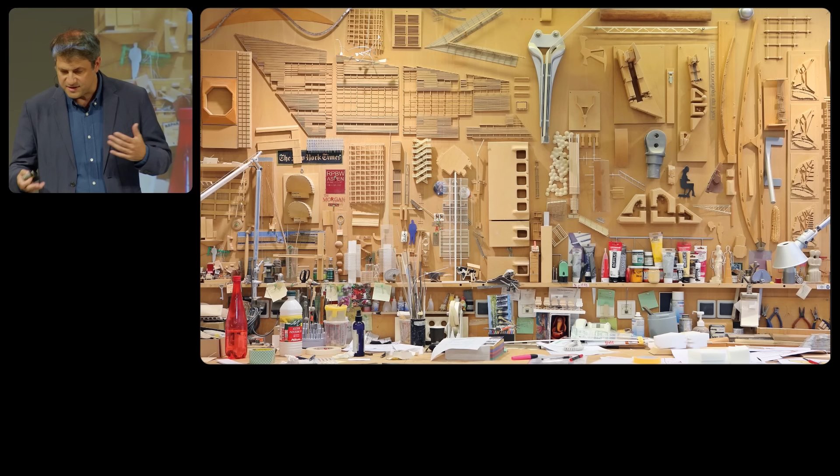And that process is a process of research, of trial and error, iterative seeking for the correct answer for the project. And we believe that the notion of workshop embodies very well that research. And there's lots of tools to go through this research. We use hand drawing, we use digital drawings, of course, as well.

But there's something that we really like to use, especially at the beginning of the project, and this is the physical models, because the physical models are something that you can manipulate with your hands. You can do lots of iterations pretty quickly, and they allow you to test different massings, different scales of the building, different proportions. And sometimes even while you are trying with your hands, you may find something unexpected, and then that initial idea that you had diverges to something unexpected, and that's the magic of this approach.

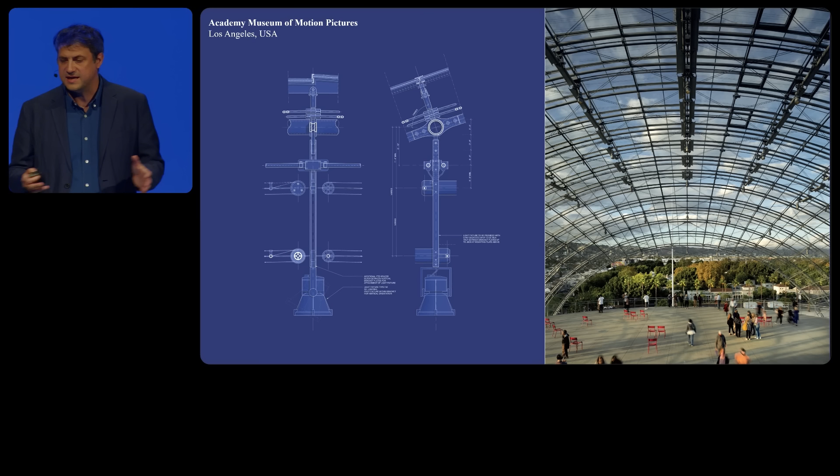Another important element of that research, that idea of workshop, is detailing, but not detailing understood as something that you did at the end of the design phases, the detailing of the building before you start construction. Detailing understood as those aspects of the building that from the very beginning of the design, you want to capture, details that represent the essence of the building. And then those details that you start drafting from the beginning evolve with the rest of the design. And that's the best way to finally get to a very well crafted building when it gets built.

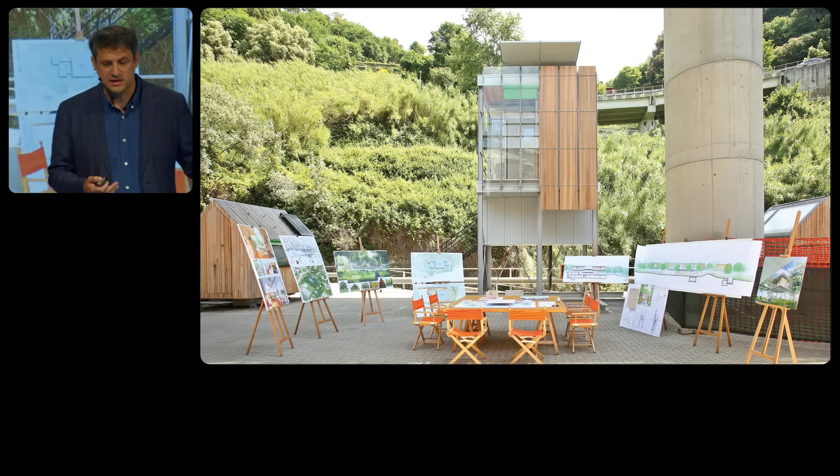There's detailing, and there's also, in this notion of workshop, one-to-one prototypes that we do in our facilities in Genoa. The opportunity for us architects, but also for the clients, to see for the first time the materiality, the scale and the atmosphere of what we are planning to create.

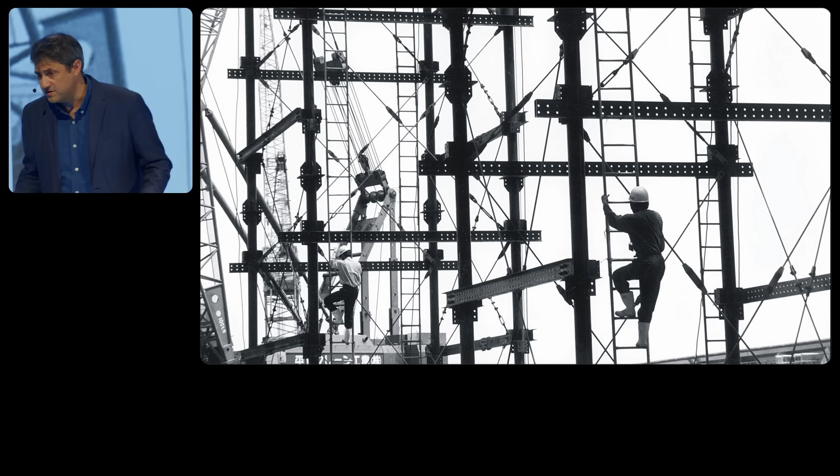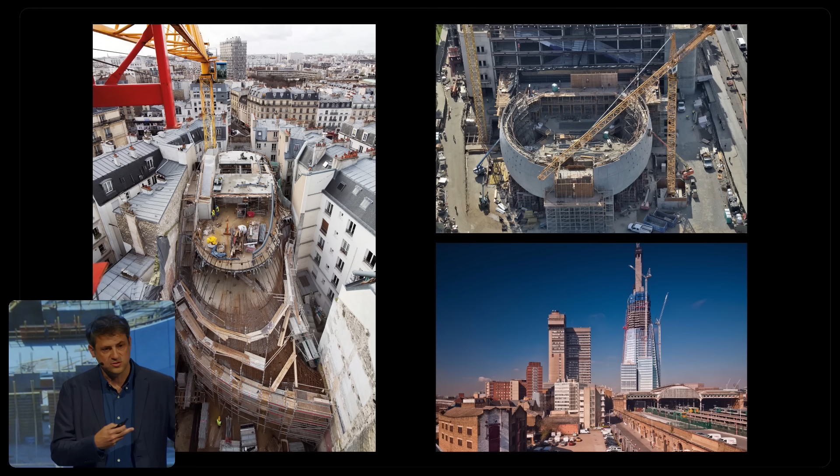And finally, in this process of research construction, we love construction sites. It's when things get real, and we like very much to be there. So we are next to the executive architect, making sure that all the decisions we take align with the character, with the essence of the project that we are trying to build. And that's the first notion of workshop.

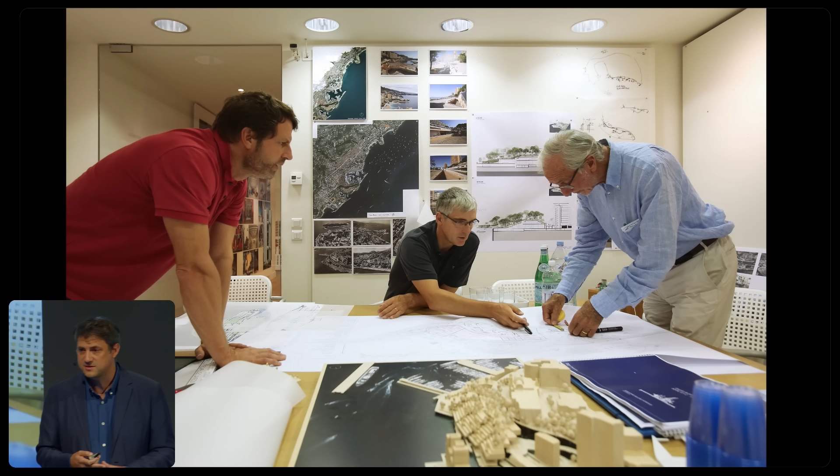We give another meaning to the word workshop. One was that process, that research. And the other meaning is the fact that the buildings are the result of a collective effort. It's not just the architect having the brilliant idea, it's really a choral of people, each one of them bringing their expertise, and that includes the clients. We need good clients to do good buildings, engineers. Everyone needs to sit around the table and bring their best in order to get to the best possible building.

Then the second notion I wanted to go through with you is the notion of what does it mean to build sustainably or to build responsibly. And we take a very broad view on what this means for us, building responsibly. In a nutshell, it is improving the life of those people using the building or being affected by the presence of the building, and doing that respecting what was already there before we started building.

If we go into this notion of building responsibly with more detail, the first thing that I would like to say is the idea of resiliency, building buildings that can sustain earthquakes, typhoons, and that will be there for hundreds of years, flexible enough to anticipate problems that may occur in the future.

Building responsibly is also erecting buildings that participate in the social life of the city where they are built, buildings that are open to the people and that encourage exchanges between people, etc.

Building responsibly is obviously respecting the natural habitats where we are intervening. And finally, it is harvesting green energy as much as possible and building with local materials and low carbon.

And the third notion that I wanted to go through with you today is the notion of movement. That idea of movement is ingrained in our architecture from the first projects of the practice, and it is this idea to experience the building in a promenade. It is how you really navigate through the building that makes the project interesting.

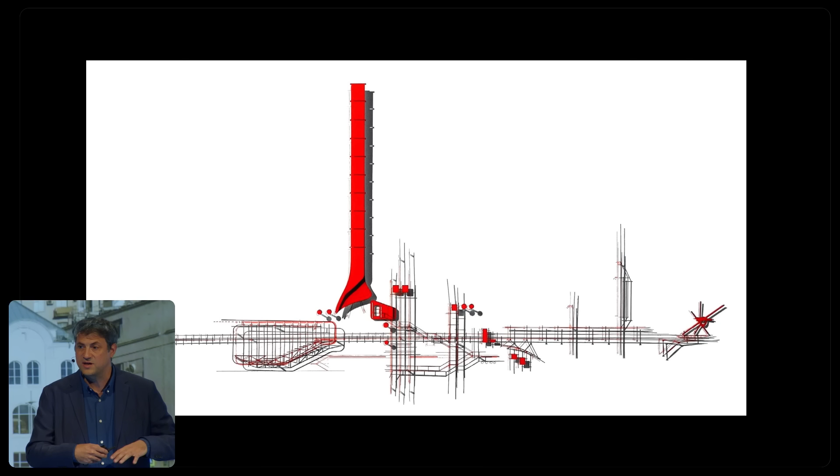Sometimes that notion of movement is not explicit from the outside. That's the case of a cultural foundation that was previously a power plant in Moscow. And what seems a power plant from the outside, when you get into the building, you discover a web of vertical and horizontal circulations that allow you to navigate and to discover the building from the inside.

Lightweight walkways, staircases that are in harmony with the pre-existing structure of the power plant, light enough not to interfere with the steel and the clarity of the pre-existing building.

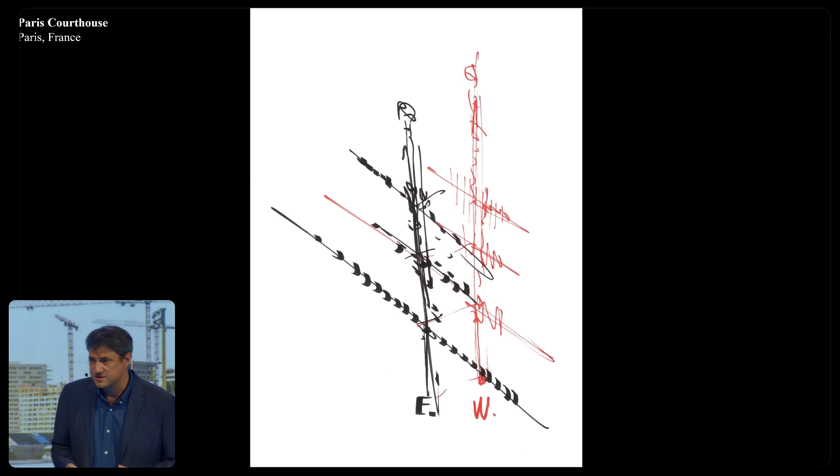On other occasions, that notion of movement becomes more explicit in the building when seen from outside. And that's the case of the courthouse in Paris, where we can see that the massing almost is formed by this idea of expressing the movement. We have a vertical spine at the very middle of the building's elevation, and that's where the vertical core is set. And that vertical spine that we can see, these are the tracks of a panoramic lift going up and down.

And then from that vertical spine, we can see the horizontal terraces extending sideways, which give you the opportunity to see the city of Paris from these landscape terraces. And finally, the solar panels as well, which emanate from that vertical spine and also define that horizontal circulation of the people trying to find their room from the central core.

In other occasions, like in the Georges Pompidou Center, everything was put on the outside of the building so that the interior of the building would be only dedicated to the contemplation of artwork.

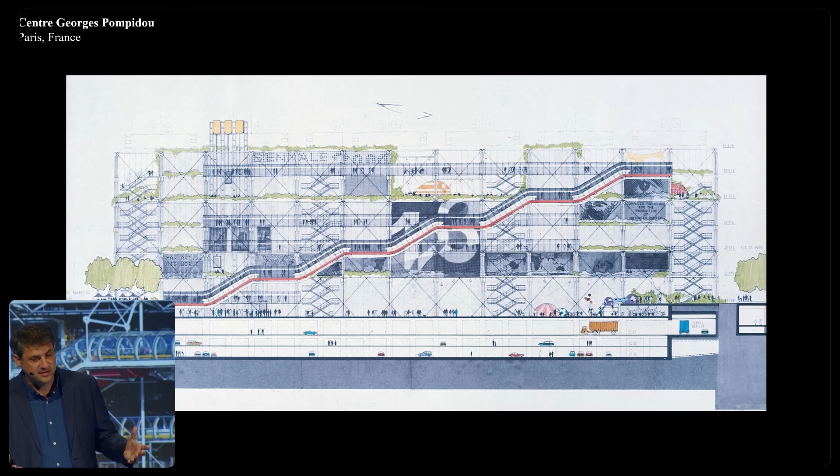And in this gesture of getting everything outside the building, structure, services, also the circulations get outside the building, and they become the main feature of the main facade of the building, that escalator going up, and the introduction of the idea of promenade, something that you start from ground floor, and those escalators taking you up to the top floor.

In other occasions, it's not one promenade that the building is offering. Sometimes more than one promenade is being offered. In this case, Centro Botín in Spain, the building is lifted off the ground some meters, and then from the center, you can see below the building the seaside promenade. So the first invitation the building is doing is this gesture of letting you go beneath the building to find the sea and to walk along the sea.

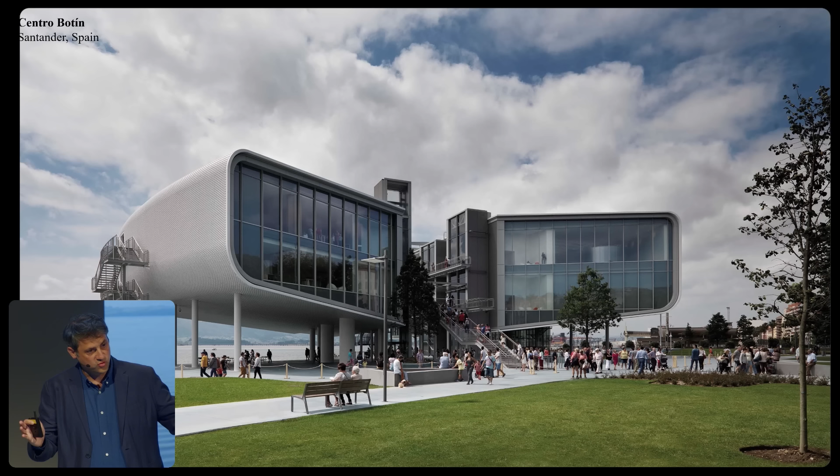But then parallel to this invitation to circulate beneath the building, there's this invitation. You can see the two masses of the building on both sides in a sort of welcoming gesture, almost. And then in the middle of the two main masses, you have that staircase, which takes you up to the entrance of the building, but also to something a bit more special, which is a sort of goal at the end of the promenade, which is that belvedere that oversails the sea and gives you those magic views of the Cantabrian Sea.

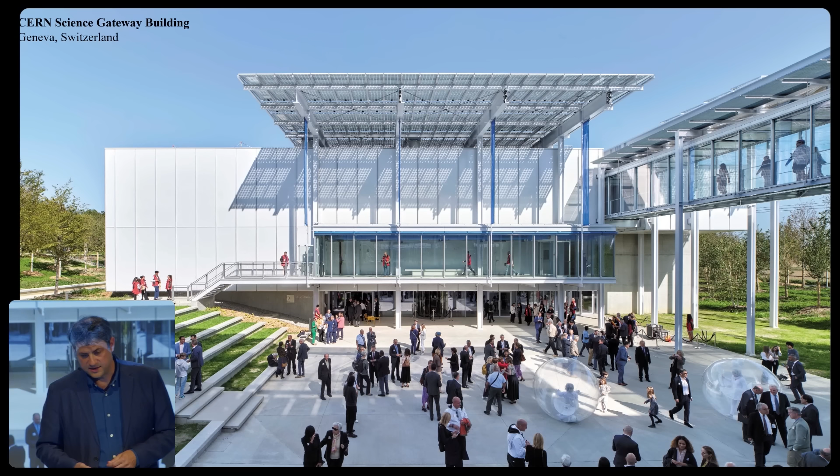Something similar happens in the CERN in Switzerland, where different buildings are connected both through piazzas and elevated walkways, and each device invites a different kind of movement with a different speed, with a different pace.

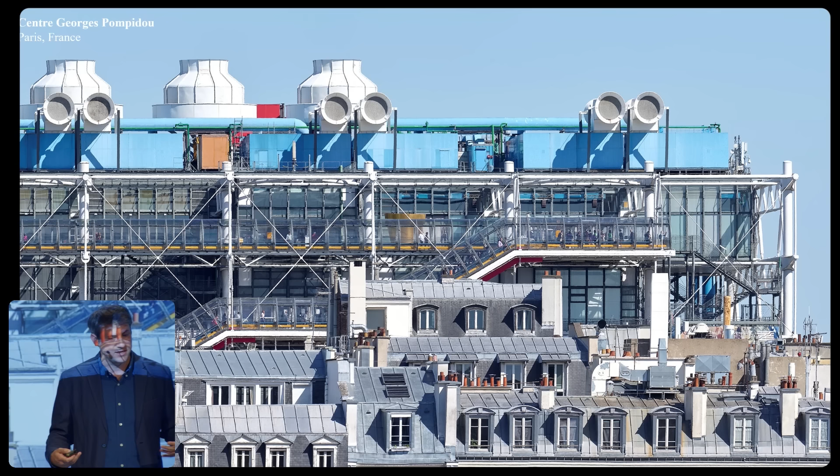Sometimes you don't move anymore, and you just stand still, and then you look at the movement deploy in front of you. That's the case when you go up. That photo is taken from Fondation Pinault in Paris, and you have a very nice view of the Pompidou Center. And from that perspective, you are not moving anymore, and then you see the people moving up and down the escalator and along the horizontal walkways, and that becomes a spectacle almost.

And then sometimes there's no movement anymore, but even when there's no movement, there's at least the wind and the sunlight that may produce surprising glaring on certain metallic elements.

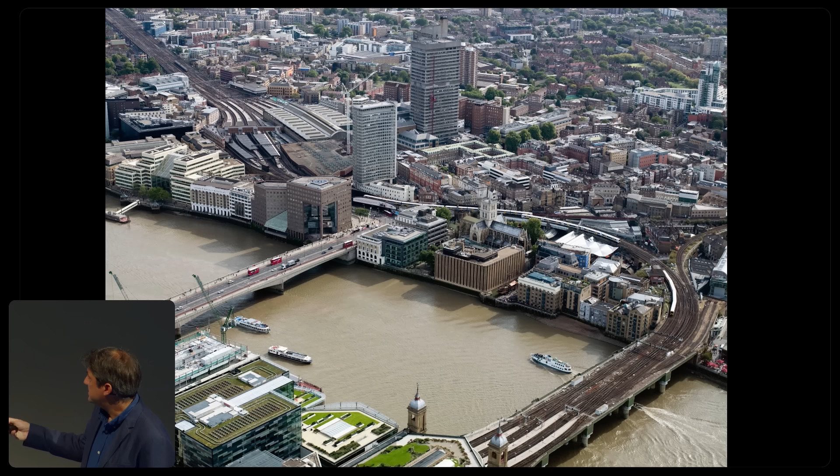And let's take a look at how London Bridge Station was before the intervention. We can see the station is that white building, which abuts against that sort of brown building, which is the bus station. We can see in this image and on the next one how there's no indication of urban space there. Everything is covered by roofs, and I'm going to go to the previous image, and the station, instead of having a clear facade and a piazza in front, some quality urban space, has nothing. It's even difficult to find it.

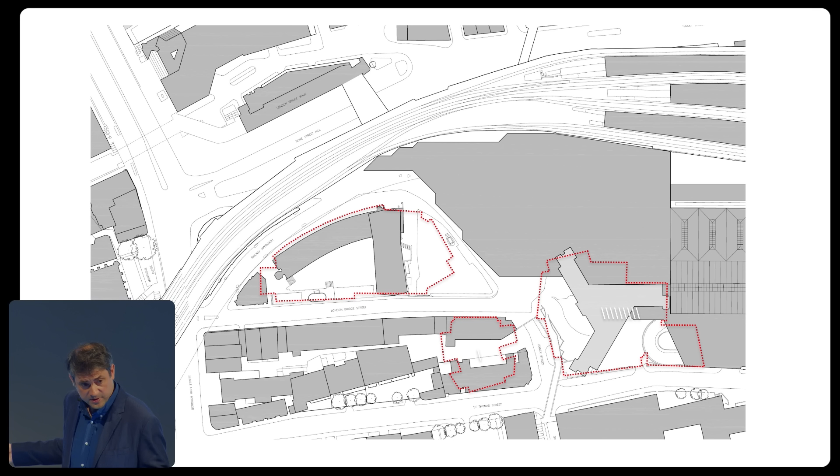That's how it looked in plan before. That's the image on the right. We can see these big gray areas are the roof of the bus station, and that's the roof of the railway station. And we can see the pre-existing buildings and the almost total absence of urban realm. And that red dotted line is the boundary of the buildings that we are planning to build in that process that lasts 25 years. The Shard on the right-hand side, the News building on the left, and Shard Place in the middle. And what we are trying to achieve is what we can see in that other image.

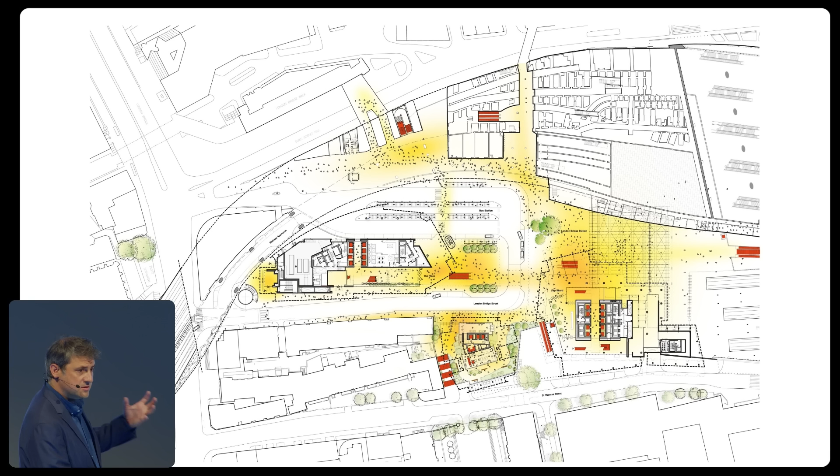Our new buildings, that's a diagram that shows the intensity of movement, if you want. The more intense the orange, the yellows, the more intense the movement there. And we can see how the buildings hardly touch the ground. The boundary of the buildings oversails the public realm, and then the buildings only touch ground with the cores and the entrance lobbies that we need to access the building. The rest is liberated for the public in order to generate public realm.

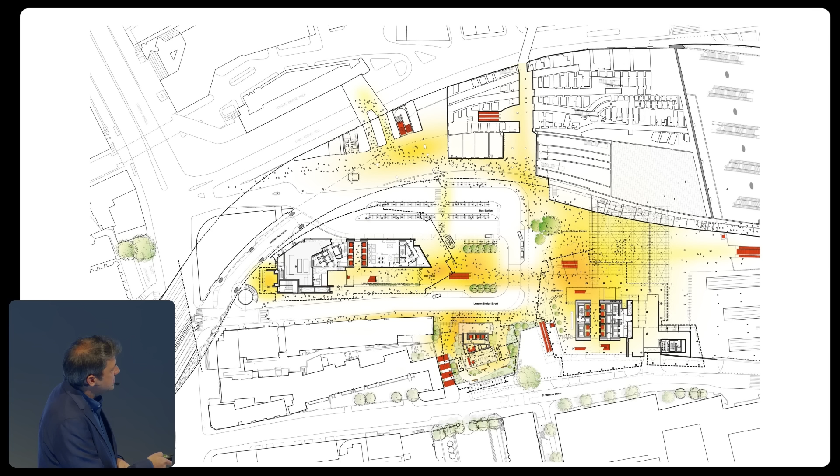So by doing this, the first thing we can do is to demolish, obviously, that big roof, that big structure that was covering the bus station. And then we relocate the bus station partially under the News building, liberating all that central area so that we can have a central square at London Bridge. Then, by doing all that, we liberate the space to have a clear entrance to the railway station, as we'll see later.

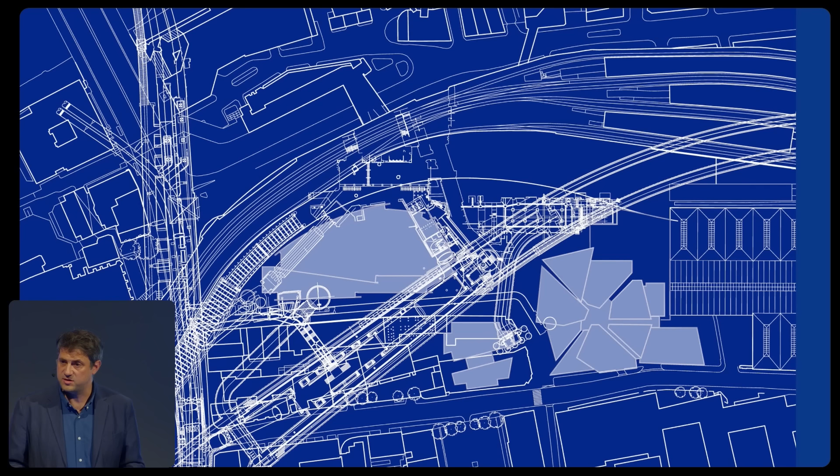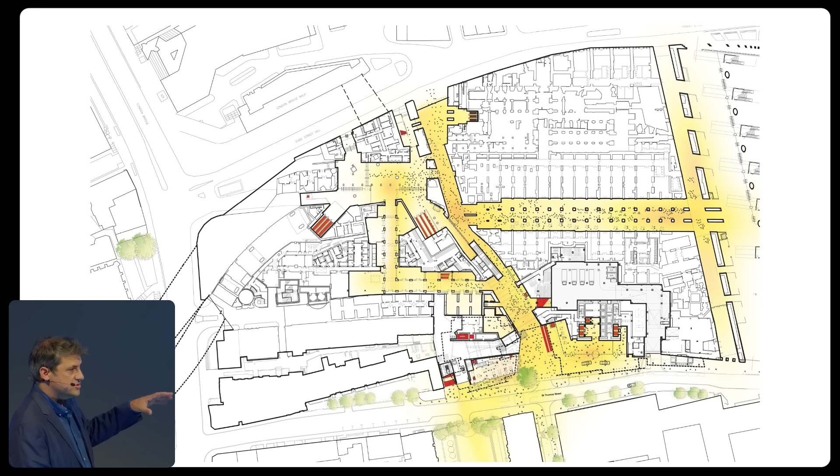But we also need to be mindful of what happens underground. We are building on top of a maze of tunnels because we have two metro lines passing below our buildings, the Northern Line and the Jubilee Line. And that's another reason why the footprint of the buildings when they touch the ground is very limited. And on top of that, at the lower level, we also need to improve all the circulations and the access to the metro stations by the construction of these three buildings, the Shard, Shard Place, and the News building.

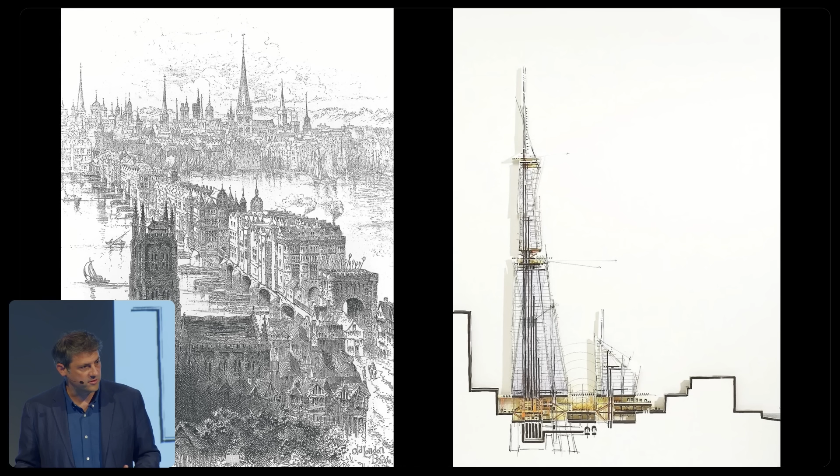And because that high-rise building, the Shard, is not standing in a cluster of other high-rise buildings, the idea was to give it a recognizable shape, and also a shape that makes the building not imposing. And getting inspiration from the Venetian paintings, where you see all these spires emanating from the religious buildings across London. From that came the idea of having a building that is larger at the bottom, and it goes thinner as it rises up to the sky.

It vanishes to the sky, and there was the idea also that the different shards forming the shape of the building would never meet each other. They would leave the end of the building open, and they would just coincide somewhere in the air, in an imaginative vanishing point. And that's the result, that building that is larger at the bottom, and it goes thinner, and it's not imposing at all. It feels light, inviting.

And then this aligned with the brief, because in the brief we had offices, hotel, and some residential. And then that shape, the lower part of the tower, adapted pretty well to the offices because it was larger. And then the top part adapted much better to the hotel and to the residential units.

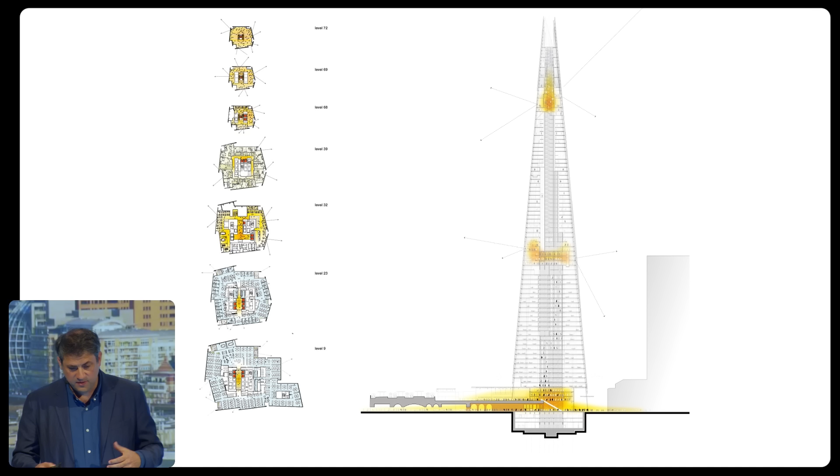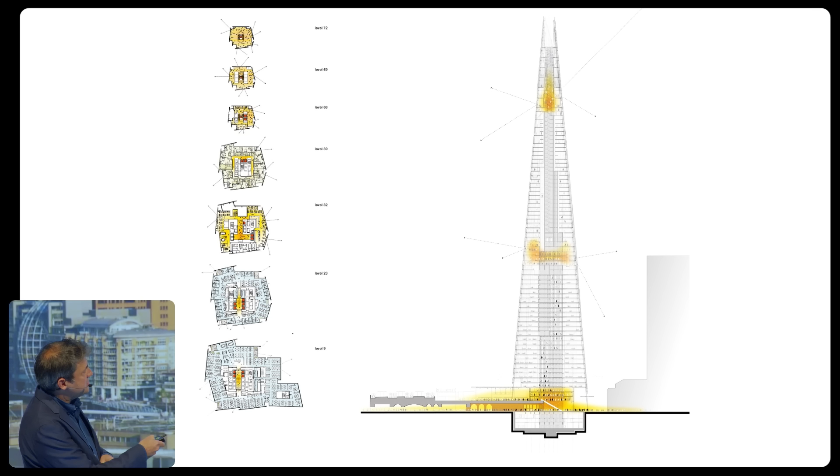And then going back to the idea of movement and flow of people, there was this intention to bring the public also up the building. The building should be open to the people, should not feel like a fortress. Hence, this idea to have some floors in the middle with restaurants open to everyone, and at the very top, a viewing gallery from which to see London. It was the idea that the access of this gallery was free of charge, but the client thought otherwise.

And then, because we didn't want the building to feel imposing, and we wanted the building to feel so light, there was this idea of taking advantage of the fact that the facades are inclined, and that because they are inclined, they will have this ability to reflect the changing light, the changing conditions of the sky. The ceiling of the sky, of the London sky.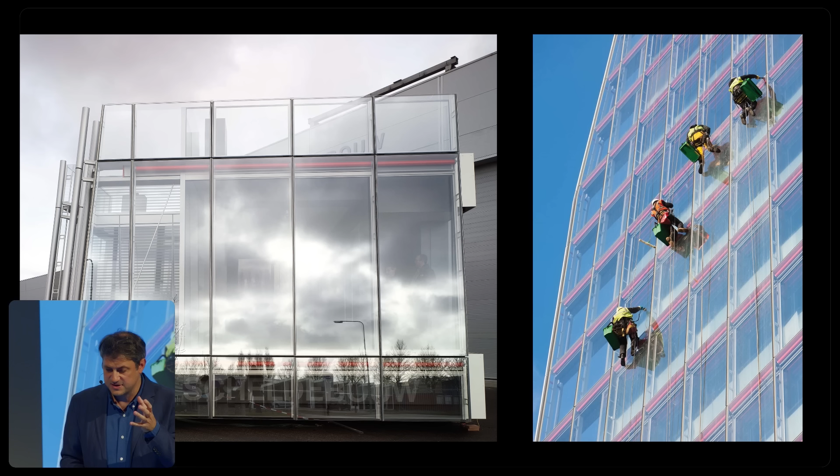So we wanted to find a facade that could reflect those changing conditions, but not like a mirror building. It's just subtle reflection. Sometimes you can see through, sometimes you have those vivid reflections that animate the facade of the building. And then we worked with a glass manufacturer, and we developed a new coating, which is around 25% reflective. And that gives that special color that the Shard facades are able to project. And this is a bit the result, where even at dusk, depending on the incoming sunlight, you may see the different planes of the Shard getting those vivid reflections.

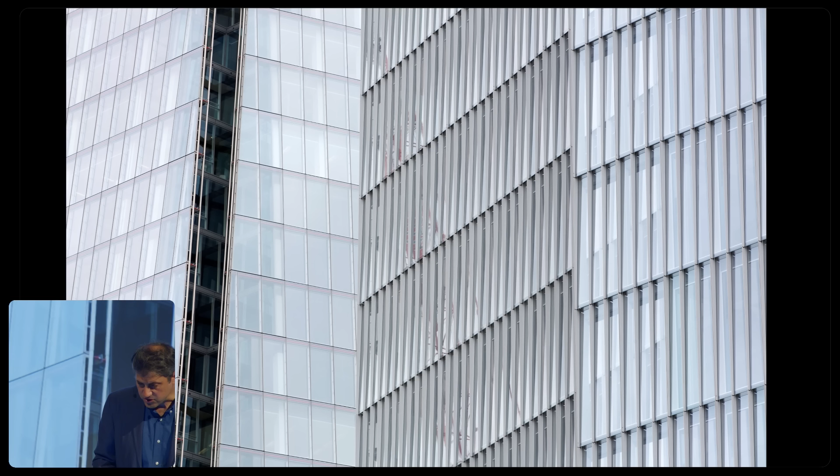And once the Shard was completed, it was the turn of the News Building, which was completed in 2014, with this idea that that building needed to share the DNA of the Shard. It should look of the same family, but at the same time, we wanted the building to state its own character. So we didn't want the building to have inclined facades, but still we wanted the building to reflect the sky. So in order to solve this, we opted for setting each glass pane inclined, but then to set them in a shiplap position so that the overall facade is vertical, but each glass pane is still reflecting the sky. You can see in this image the Shard facade, which is inclined, and then the News Building facades, which are vertical, but each glass pane is inclined, reflecting the sky.

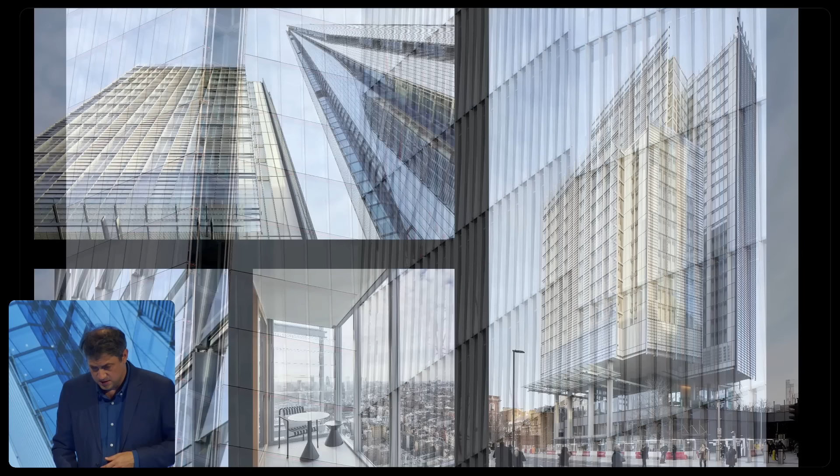And then finally, Shard Place. And in here, we wanted to give it a more residential look, because it's a residential building, and we needed to introduce opacity, of course. Also, we had to try to use glass in a different way. So still the same coating, still inclined glass panes, but in this case, these glass panes are very small, are louvers, and these louvers are set in a shiplap position again, and they give a very different grain to the facade of the third building.

So overall, it's a complex of 3 buildings. They share a lot, they have a lot in common, and at the same time, each one of them affirms its own character. And the 3 of them as well have operated a complete urban transformation of London Bridge Quarter.

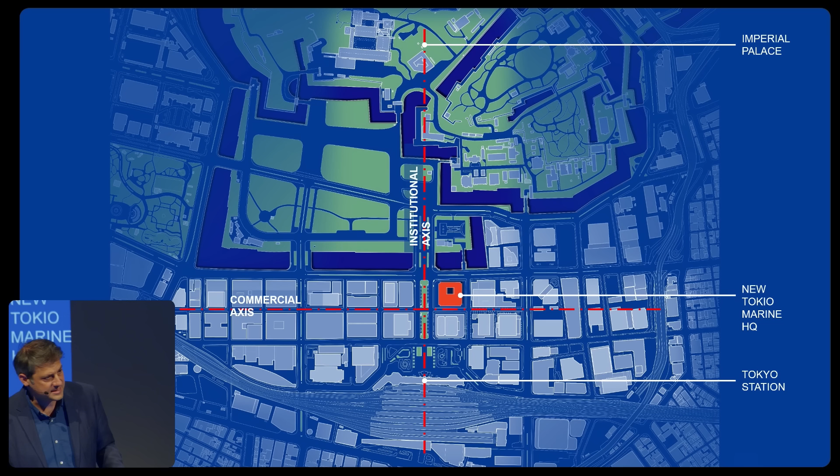And that takes us to the second case study, which is Marunouchi Tokio Marine. It's the headquarters building of an insurance company in Tokyo, and it's a very special project. The client came with a very strange request. They told us that they needed a new headquarters building, but they wanted us to use as much wood as possible. The reason was that they wanted the building to be a bit of a manifesto.

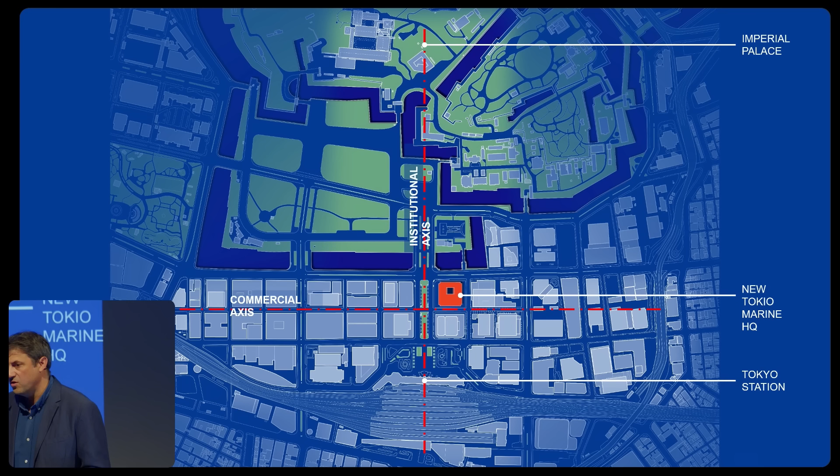The wood industry for large-scale buildings is not very developed in Japan, far from the situation in Europe, and they wanted this building to really trigger a change in the local industry. So, getting back to the building for a moment, the location is amazing. The building is right next to Tokyo Station, and in front of the Imperial Gardens. Tokyo Station is probably the most populated station in the world.

And then it's a large scheme. It's 84 by 84 meters in plan, 100 meters in height. And yet, in the context of Marunouchi, the Tokyo Financial District, it looks contained. We were surrounded by such big monsters that we decided the building had to be special for its well-balanced proportions, the lightness of the facades, and also the use of wood. And finally, the building needed to be special also for how it participates in the social life of Marunouchi, the social life of Tokyo.

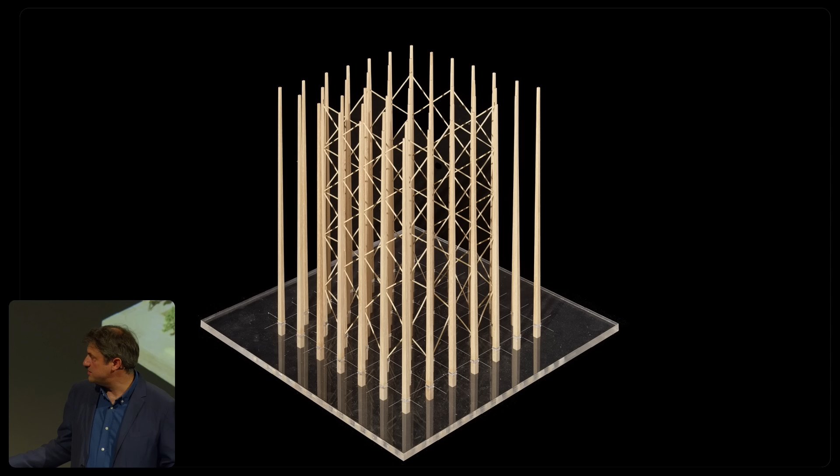So going back to the question of wood, we really like to use wood, but we wanted to use it meaningfully, to make sense of it. So we started a bit of research looking for inspiration, and we found these amazing forests in the Nagano prefecture in Japan, with cedar trees that go up as high as 70 meters looking for the sunlight. We also looked at traditional architecture in Japan, the wood column, which is a symbol of stability, of resilience. With all these ingredients, we came up with the concept: the building would be a forest of wooden columns, thicker at the bottom and thinner as they rise up to the sky.

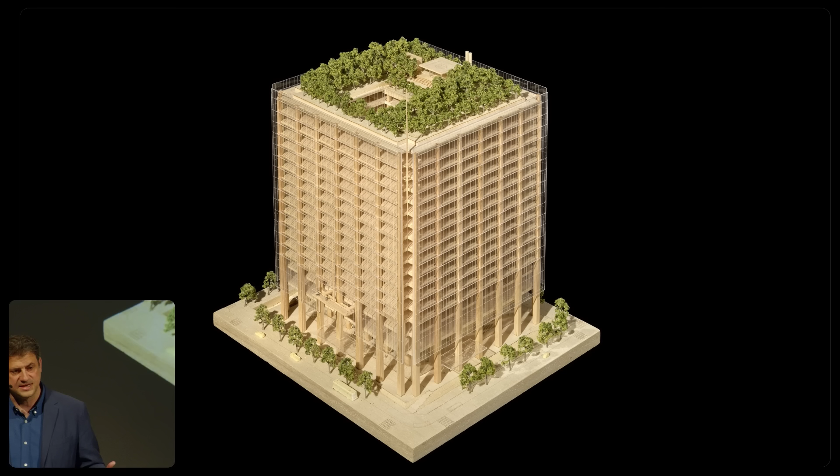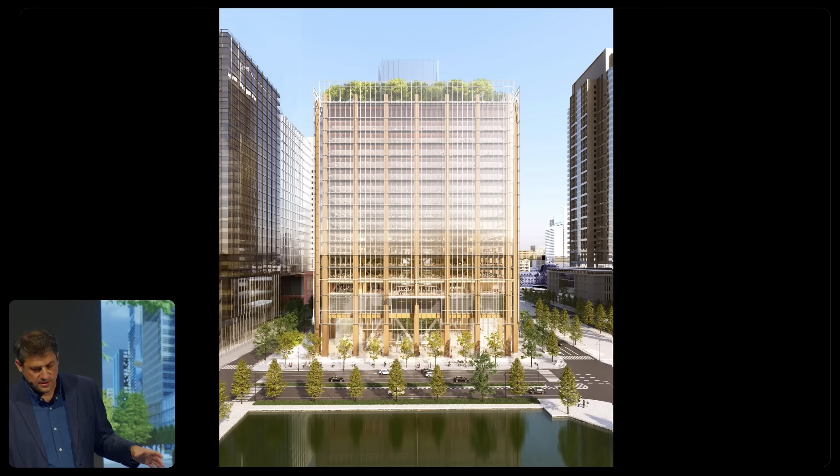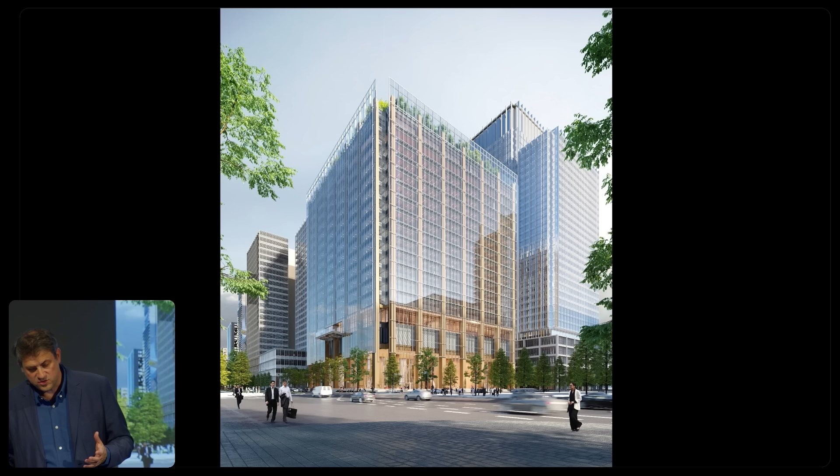But the columns would need not only to support the building, but also to define its character. So we decided that the perimeter line of columns needed to be part of the facade, to show the essence of the building to everyone. The columns are, for the most part, protected by an external skin made of laminated glass. But at the bottom, the columns get uncovered and form an arcade around the ground floor. And at the corner, something special happens, because that exterior skin disappears, and it's the moment where you can see the wooden column from bottom to top uninterruptedly.

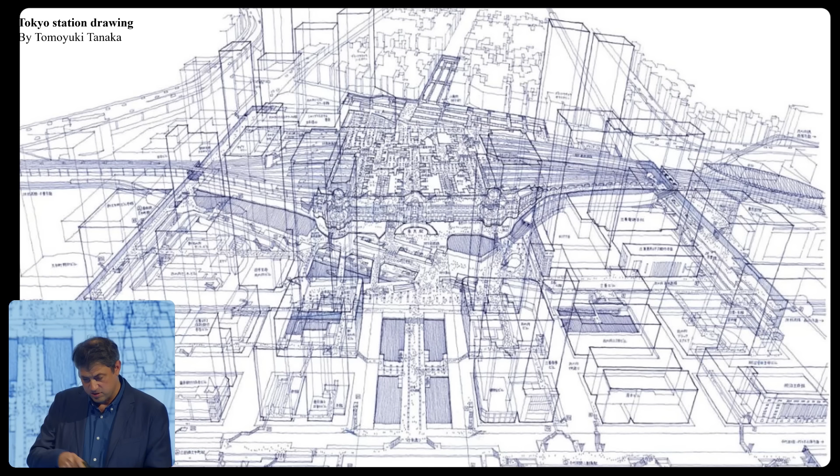Then I would like to step back for a second. That's a drawing by a Japanese architect called Tomoyuki Tanaka. He calls them X-ray drawings because they show what happens underground and above ground at the same time. We can see Tokyo Station at the center of the image, but also our site in the foreground, and how underground, Tokyo Station connects with almost all buildings across Marunouchi. We have that immense flow of people going both underground and above ground across the whole financial district.

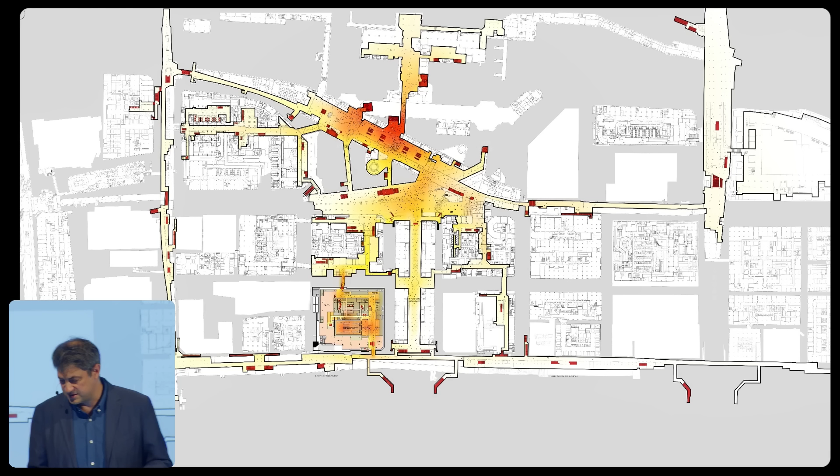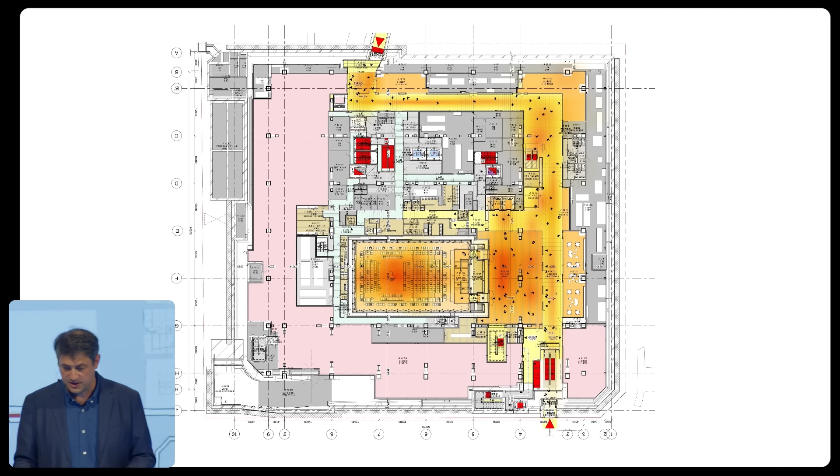And this is a drawing that we have done of the infrastructure. We can see Tokyo Station at the center, and our scheme that links Tokyo Station with the underground at the bottom of the page. We want our building to participate in this flow of people, but also to offer people an incredible experience. Hence, we have some retail units at underground level, but we also have a concert hall, designed with the best possible acoustics for chamber music and with 500 seats. It's meant to be open for everyone in Tokyo. So it's a private building, but still a building that participates in the social life of the city.

Then moving up at ground floor, the building tries to do the same thing on this level. With the vertical core set eastwards, we liberate the west, facing the Imperial Gardens, for a piazza which is open to everyone. The piazza is organized around a central patio that brings light from the very top of the building. And in this space, we can find multiple public activities.

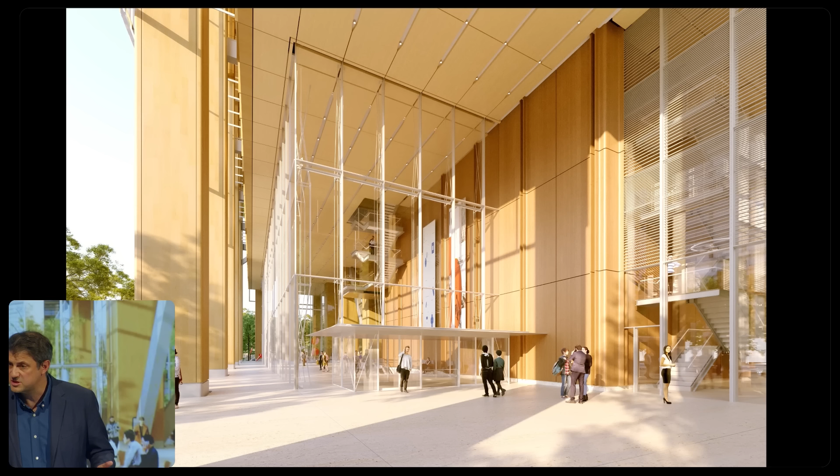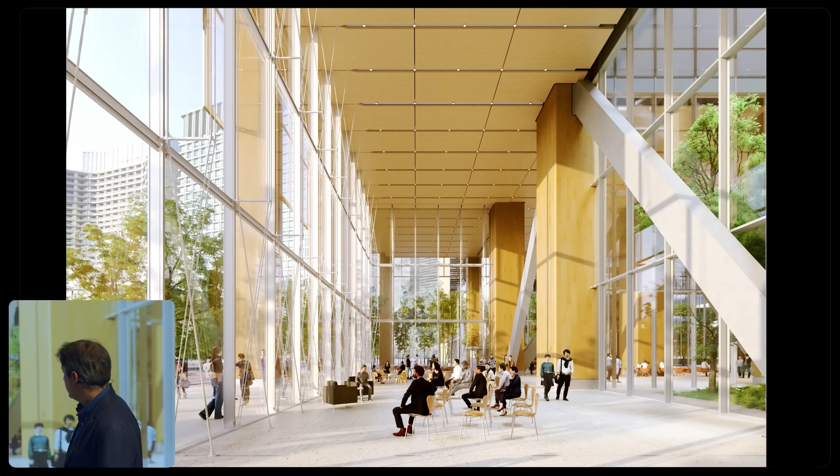The facades of the piazza are as transparent as possible in order to blur the lines between interior and exterior and invite people in. On the west facade, we have the best space facing the Imperial Gardens, and it is a perfect space for exhibitions, lectures, and small concerts. And then to the north part of the patio, we have a cafe.

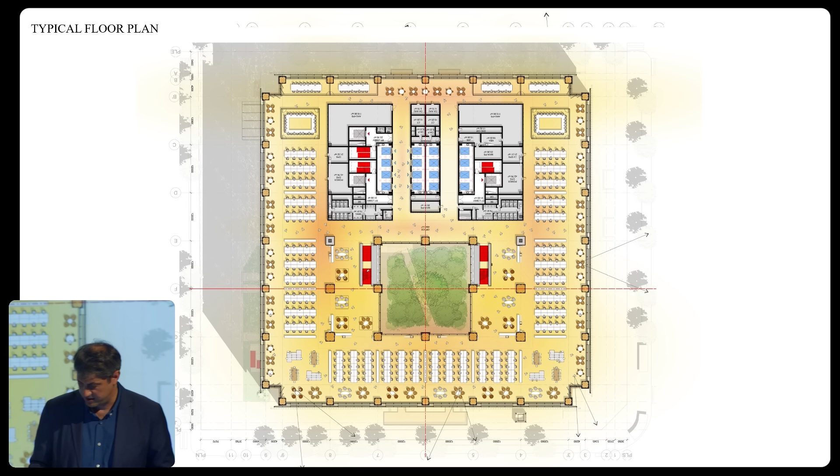Moving up, we have the typical floors. And again, with the core, which is offset to the east, the office floor is organized so that it faces the Imperial Gardens. And it's arranged so that the main working spaces revolve around the patio. And the patio is a very nice device because it allows you to see your colleagues on the floors above and below. And the presence of these two convenience staircases allows you to move up and down and to meet your colleagues, encouraging movement and casual encounters.

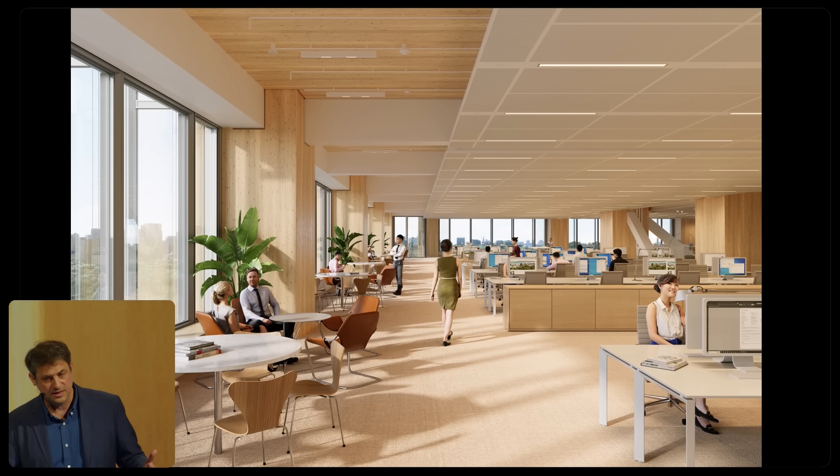That's an image of the typical floor. The columns are very big, but in the scale of the building, they look perfectly in harmony and complement the interior space pretty well. And then the convenience stair that we were mentioning before that allows you to go from one floor to the other one with ease.

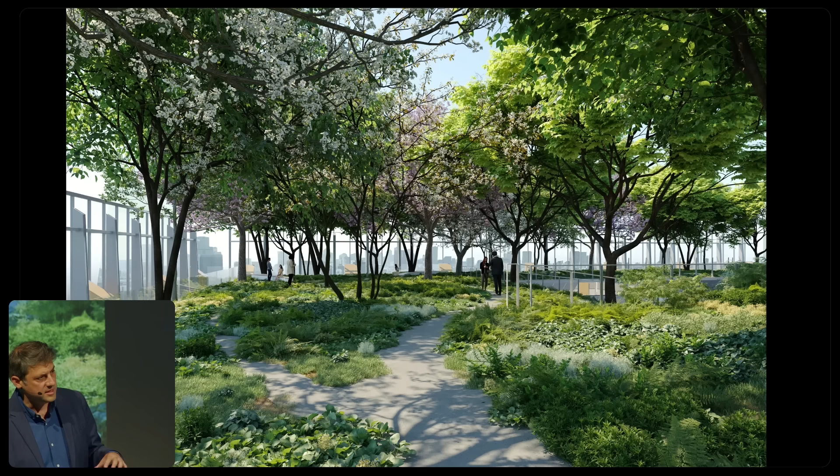And finally, at the top of the building, a roof forest. It's a 75 by 75 roof forest with more than 200 trees. And the way in which it's conceived is after the concept of Satoyama. The Japanese Satoyama is a man-made forest in the suburbs that is let to grow quite freely. It's not domesticated, it's not manicured. And we like this idea for this to feel like a forest, not like a domesticated garden.

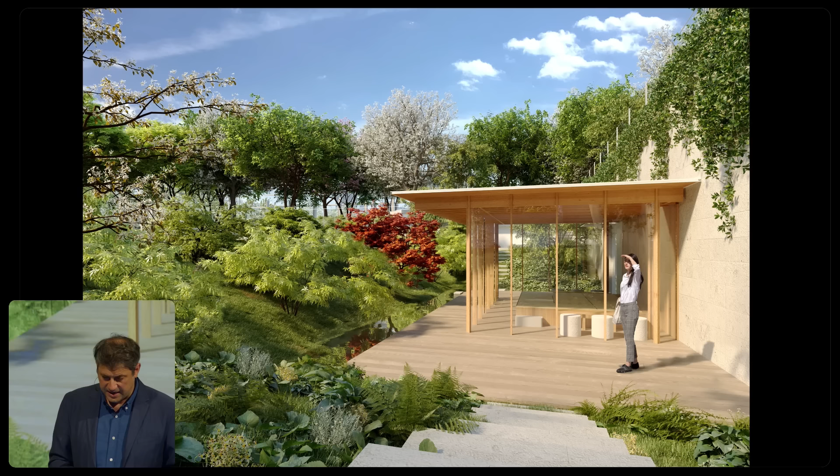And then between the ground covering plants and the bottom of the canopy of the trees, we have that layer which is occupied by the tree trunks. But in between the tree trunks, if we close our eyes a bit, we can see the city all the time behind. And at the very center of the roof forest, there's a sunken garden. And it is in this place that everything stops. There's no movement anymore. And we have the tea house for the celebration of the tea ceremony. And it's there that we forget that we are in the middle of Tokyo and we only see the sky and the vegetation around us.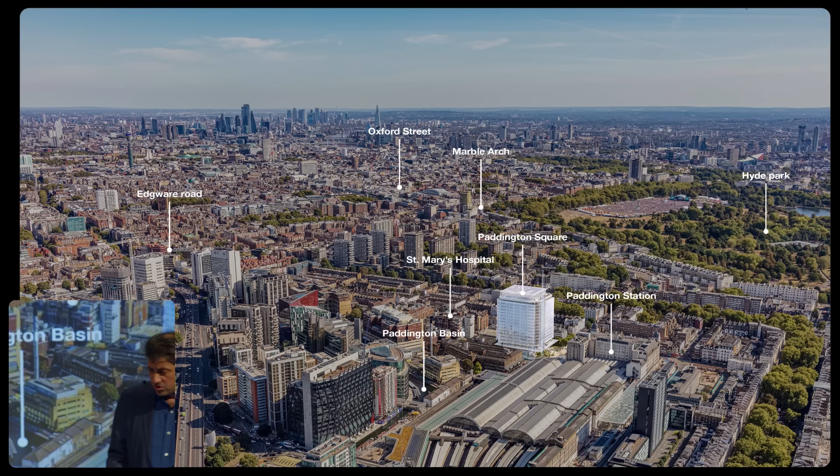Finally, the last case study that I wanted to present today is Paddington Square. Again, located next to one of the main train stations in London, 10 minutes north from Hyde Park, and we can see in the background of the image the Shard and the City of London, and farther back, Canary Wharf. Let's take a look at how that bit of London was before the intervention. We can see the original station.

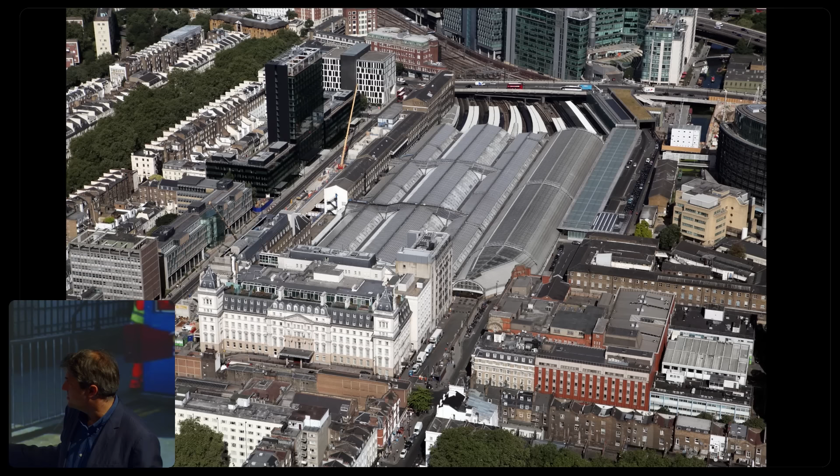The first vaults that were built were these three on the left-hand side of the images. Those are the original vaults from 1850 by a very renowned engineer called Brunel. And the station also included that building, a Second Empire-style building, which acted as the facade of the station and at the same time accommodated a hotel. Later in the 20th century, it became very clear that the increase in railway traffic needed an expansion. So that fourth vault was built on the right-hand side.

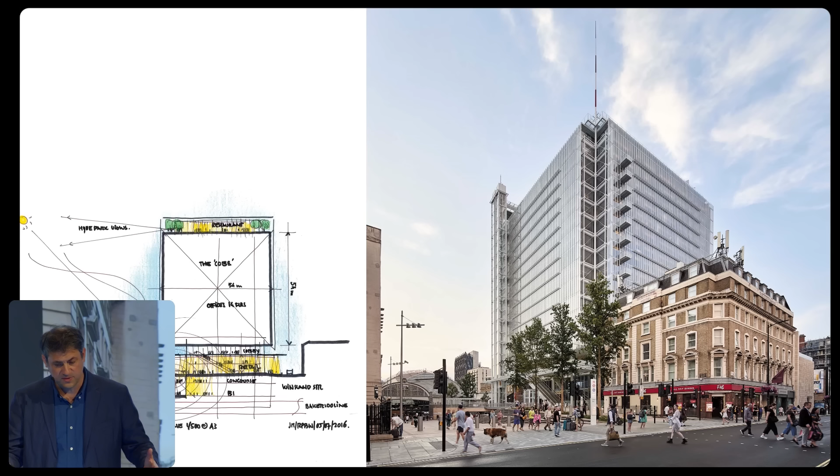And then we demolished that wall that separated the alley from the street, and we created that gentle staircase that links two piazzas, the upper piazza and the lower piazza.

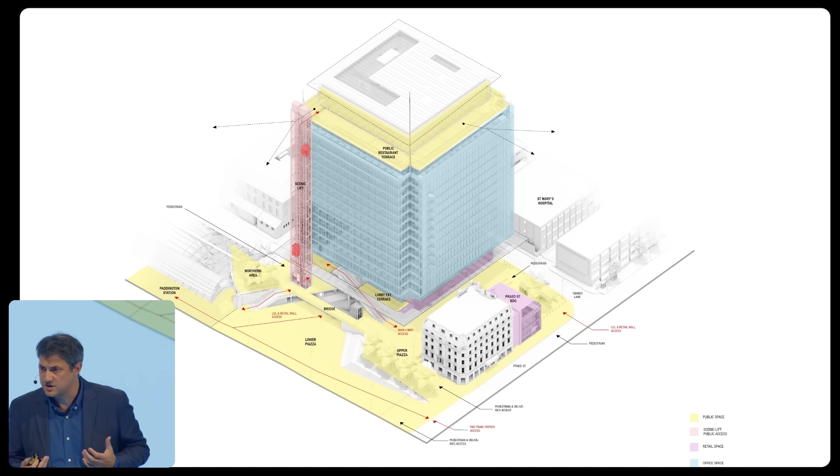Let's take a look now at what was our strategy now that we have all the people coming out from the station, and how to deal with that flux of people and how to offer those people amenities and activities. And for that, we wanted to offer much more than the ground floor. So the first thing that we thought is that the roof of the building should be offered to the public.

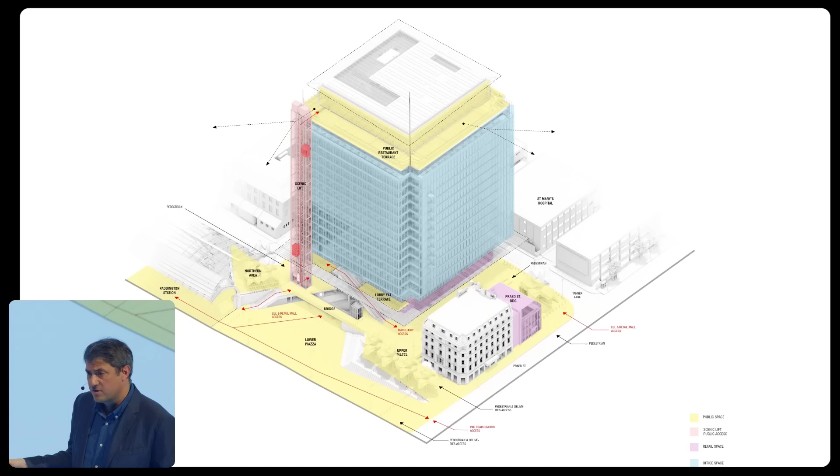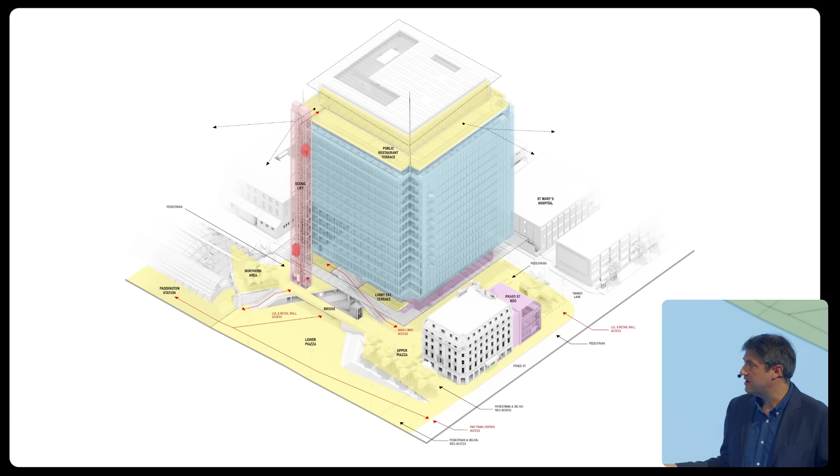So at the very top of the building, we have a roof which is accessible using this set of panoramic elevators. And in here you have nice views of the city, and you have bars and restaurants. Then moving down, we have level 3. At level 3, we place the main lobby for the offices, which is also open to the public, but the advantage of having the lobby of the offices elevated from the ground is that then the ground can be given to other activities, to retail activities.

Then we move down to the ground floor level of the upper piazza, where we have retail spaces that animate all the promenade from the station up to Praed Street. And finally, that semi-basement level, which is the level of the station, where we create a retail mall that crosses the building diagonally, and it ends with an escalator so that you can go up again and find the level of the upper piazza of Praed Street.

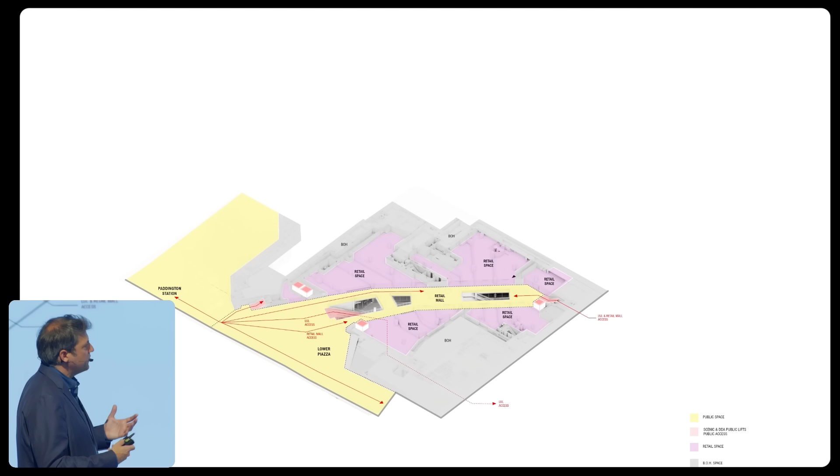So you give that flow of people different alternatives. You can go across the ground floor from the station to Praed Street, or you can choose to stay in this semi-basement across the retail mall and up the escalators. And that retail mall was the perfect opportunity to set the new entrance to the metro station there, going down. So now the new metro station is below the building.

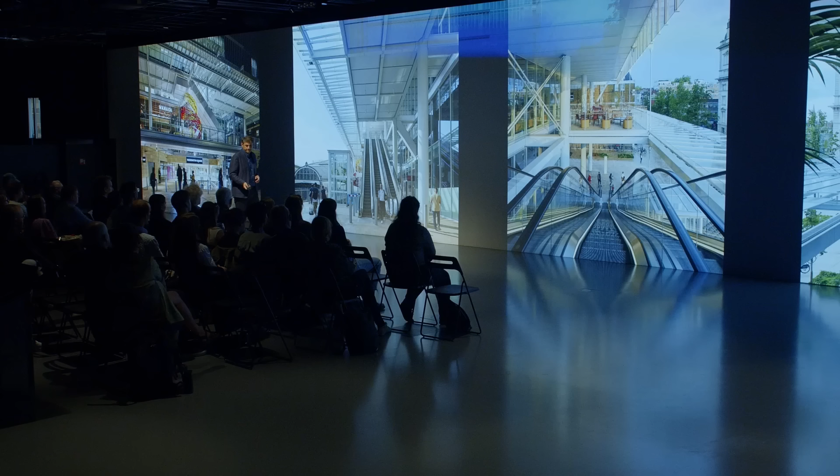And here we have a series of images that show the different circulations that the lower levels of the building are offering to the public. The entrance to the retail mall and the escalators going to the sky lobby behind. Those escalators that take you to the sky lobby. Arriving to the sky lobby, which is a special height because you're still very close to the ground level. You have a close relationship to the ground level, but you have a very different perspective of it. Another image of these in-between spaces, still belonging to the ground, but floating in the air.

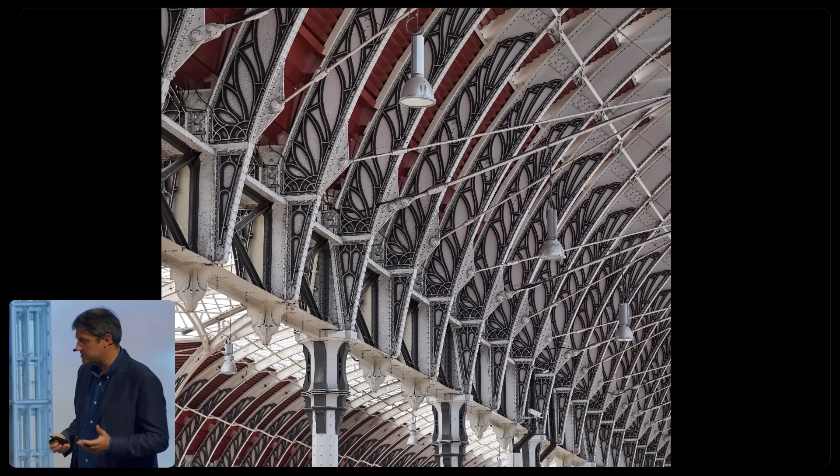And I also wanted to give a note on the architecture of the facades of the building, because it's a big scheme in a place where generally we find lower buildings built in stone and in brick. And because it's a big building, we don't want it to feel heavy or imposing. So the decision that we took was to use the architecture of the station as an inspiration, that lacy, lightweight steel structure, and then to relate the facade treatment to the architecture of the station and not to the brick and stone buildings that we have around.

And by doing that, we managed to create that lightweight mass that relates. It feels almost like the continuation of the station, and has nothing to do with what happens at lower level.